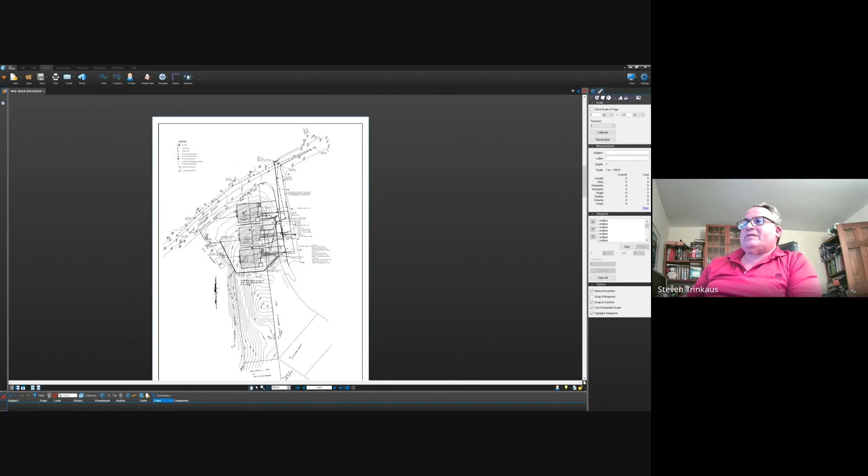We had many different layouts that utilized the entire site, with a building down on the bottom, basically parallel to Reservoir Street, and then another building up on top of the hill, where you've got a ridge top along the back of the lots from Knollwood. This is all rock up on top of the hill, but we had layouts that were up to 12 units in total.

What the applicant basically discussed with your former planner was, as of right, there were 2 lots here, we could have done a duplex on each. They're just asking for 2 additional units, for a total of 6. One would be 60% affordable, one would be 80%, and you'd have 4 market rate units. That's the proposal.

I'm sorry, there's going to be one at 80% and one at 60%? Yes, correct, Kitty. Out of 6, 2 of them have to be affordable, so yeah, one's at 60, one's at 80. Can you show us which is which? That hasn't been determined, I don't know which ones it would be. The units are all identical in this case, square footage is identical, which meets the comparable requirement under 8-30g that the unit sizes be comparable. So you couldn't have, for example, a market rate at 1,000 square feet and an affordable at 800.

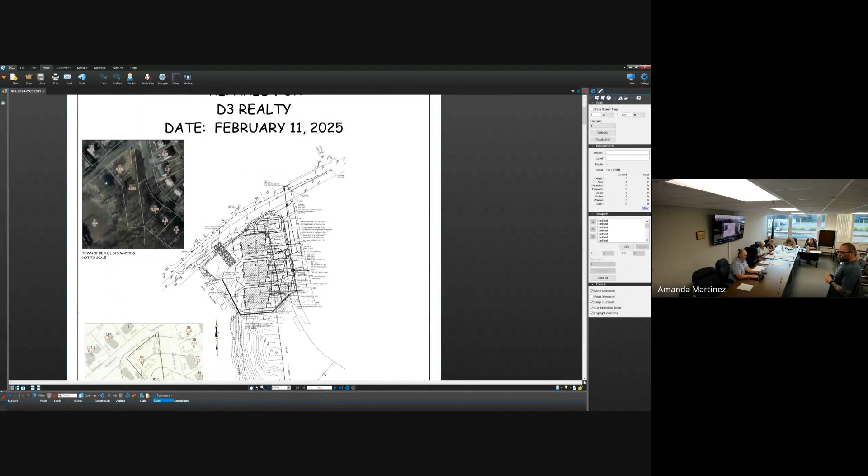There was one just built, 68 and 66, on the opposite side where there was a curtain drain put in. The people building it tied in the curtain drain to the storm drain, which goes into my backyard to the creek. That increased flooding at my house. Now anytime it rains, I get flooding in my backyard.

Not to mention the $20,000 worth of stuff I've already lost in the 5 years, plus what I had to invest trying to help the flooding issue. Nothing's been done to curtail the flooding, but we keep building in this area where there's flooding. I forget who, maybe the planning and zoning guy who's not here anymore, told me you shouldn't be allowed to build in this area because it's a flood zone. If he had his druthers, he would have bought all the units back and used that as a flood zone area, not put any houses there.

Who told you this? I told you about this when we first talked. The guy, was it Palmer before? How long ago, 2 years ago? It's Steve, I think. So he's telling me you shouldn't be building over there yet. I think it's Steve.

Hi Janine, that's my neighbor. Her house gets flooded quite often. She used to have this beautiful backyard. She's lost like 40% of it. Everything that went all the way back is now all the way here.

Now we could sit there and say it's because of weather increments, whatnot, but we're adding stuff in that area that's adding to the flooding. The Toll Brothers project over there was supposed to put good drainage in the ground, but it was done improperly from what I was told, and we still have more flooding. I don't know right now that we should be allowing anybody to build until we take care of this flooding issue.

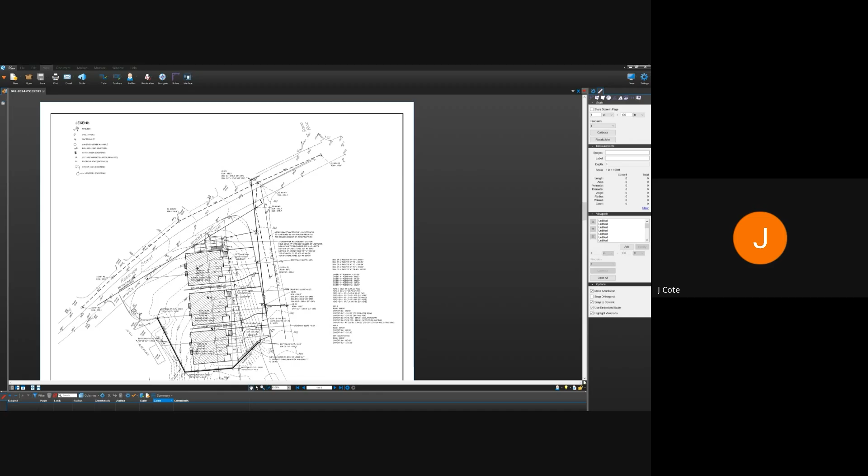But the last storm we had, the town was down here. I showed the town pictures myself of the curtain drain, of what the builder built, which to my understanding is the same builder that is going to be building Reservoir, correct? Or is this the one that just built 66 and 68? Is that not the same builder that's going to be building on Knollwood?

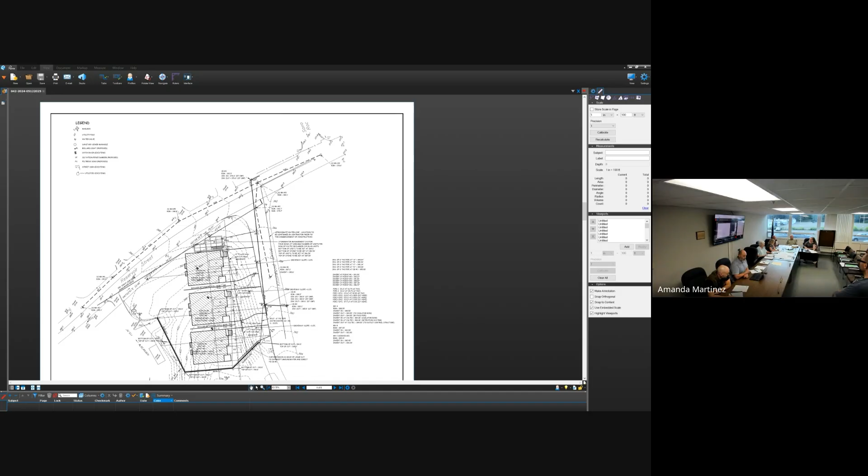Are you guys on Facebook at all? I'm sorry, go ahead. Are you guys on Facebook at all? Wait, no, anybody here on the town Facebook page? No? Okay.

So did you see the guy in the kayak with the beard kayaking down the street when we had the last storm? That was me. I kayaked from the backyard around the side of my house down my street to get my neighbor's stuff and bring it back to them. That's how bad it is.

And we're not addressing it. We're not doing anything for these people who pay taxes. One of them who goes under is Ed Keough, which some of you might know. He does a lot of work around the town.

A lot of his people. What's his name? Ed. I always screw up his last name. He's my neighbor. Steve DeShell lives on the street too, doesn't he? Yes, he does. Thank you.

So it's not like these aren't people who give back to the community. It's not a minor problem. Again, this is a major problem, and it needs to be addressed before building something else. Thank you very much. We'll have to do something about that.

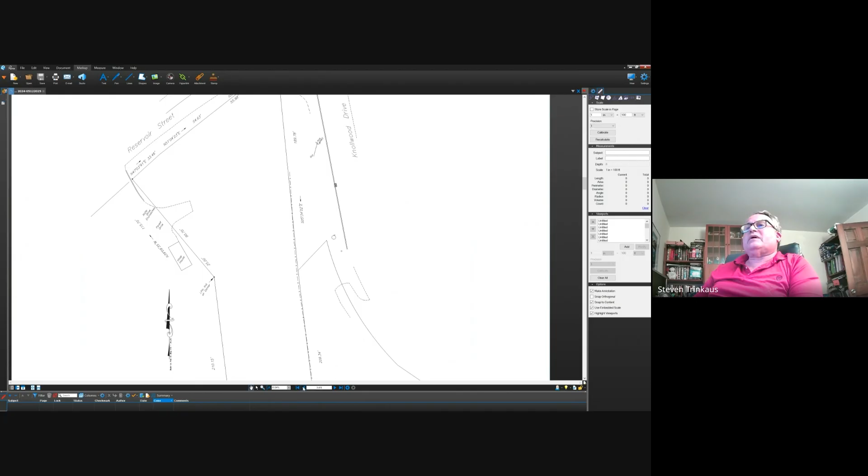Let me just go back to that sheet. Hopefully it'll show up quicker. I guess it goes the other way. Excuse me one second. Computer is being perhaps a little slower than I'd like for some reason tonight.

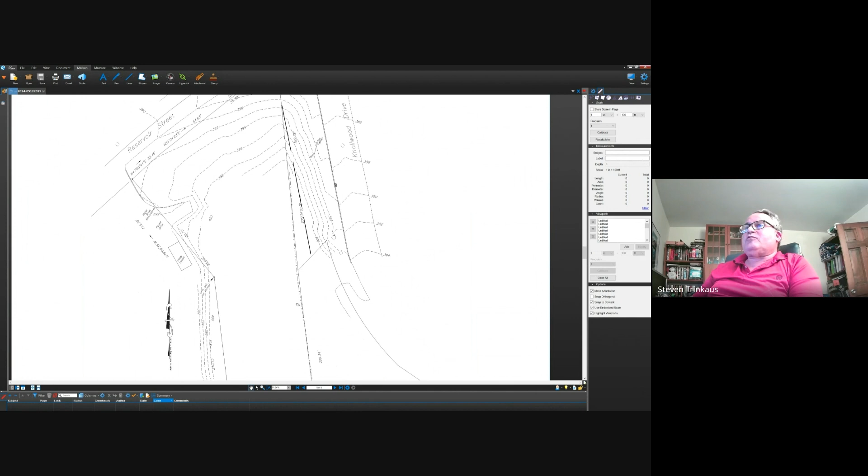But we will have detention, which virtually none of the other properties along Knollwood provide. The right-of-way line on the west side of Knollwood is set very far back. I have no idea why it was set that far back. Most of the time on a subdivision road, the right-of-way is 50-foot wide with the road centered on it. Why it was so offset to this side, I don't have an answer for it. It's just there. The driveways will come from the west side of Knollwood up to each structure.

There were concerns by Eric Swenson from your DPW department about the town potentially being asked to maintain the trench drain along the driveway. In response to an email from Jeremy, your planner, I said my client would be happy to sign a hold harmless agreement that all the work within the right of way serving each of these duplexes will be maintained by the owner or the homeowners, with no obligation of the town to maintain any items within the right of way that we need to simply get to our house.

Let's see. I'd like to actually change what I'm sharing here. So I'm going to get rid of my plan for a second and pull up something else.

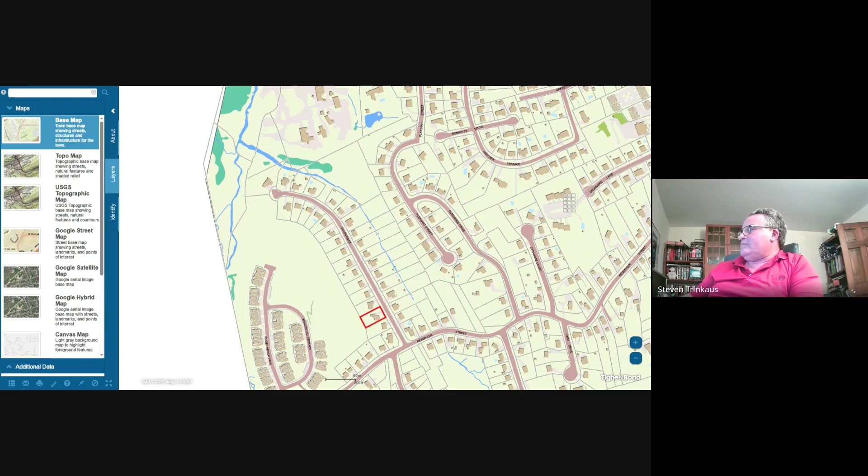Two additional units on Knollwood over what we could do as of right is not a traffic impact. In Mr. Murphy's case, regarding the proximity of the unit to the edge of the road, yes, it's a hair over 13 feet from the edge of the pavement. But let me stop sharing this and go back to my plan for a second.

It's important that when Mr. Murphy is exiting his driveway, his sight line, when he's looking to the east, back towards town from his driveway, he is looking in the westbound travel lane, which is the one farther from our site. So it is not crossing, it stays within the right of way and would not be impacted by that house, because the westbound traffic is what's coming up over the hill towards him.

He's not looking at the eastbound lane because that's the lane he's turning into to head back to town. If he's making that right-hand turn, he's going to be looking left to the west on Reservoir Street for a car coming that direction, so it's safe to pull out. If he makes a left, again he's looking on Reservoir Street, but at the westbound travel lane, which is the north side of the road, not the south side. So the proposed unit does not interfere with the sight distance in any shape or form exiting his driveway.

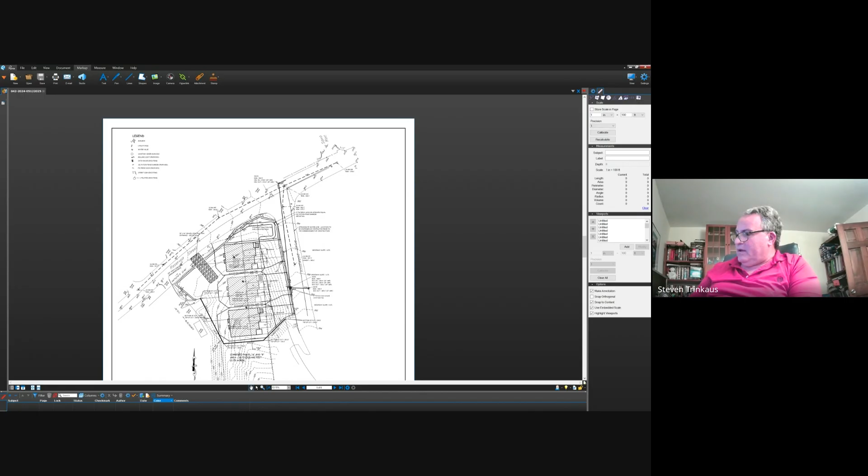I think that addresses the comments, and I'm happy to allow the continuation of the hearing. I can take a look at it, and your consultants, whoever you retain, can also take a look at the issue on Saxon Woods.

I think that road, based on what I can see on the town GIS, they probably shouldn't have put the homes on the right-hand side of the road. It's a very flat area with the brook in the back. I think that's probably where the water historically went before the road was built. Again, that's just based on 40 years of doing land development work. And it's unclear if maybe some of those homes on the east side of Saxon, some of that may have been wetlands. It's anybody's guess.

But the wetlands regulations did not come in until about the mid-70s, so development that occurred before that, builders could have done anything, including filling in hundreds of acres of wetlands. Our site is not wetlands, it's not near wetlands, we're really high and dry. But based on my experience, that kind of appears what may have been done on Saxon.

But we're here today, so the thing is, what can be done to address the issues from the neighbors, which are very legitimate. Our project is not going to adversely affect them, but it's all existing runoff that we need to see if something can be done. Thank you, I really appreciate it. So you could get back.

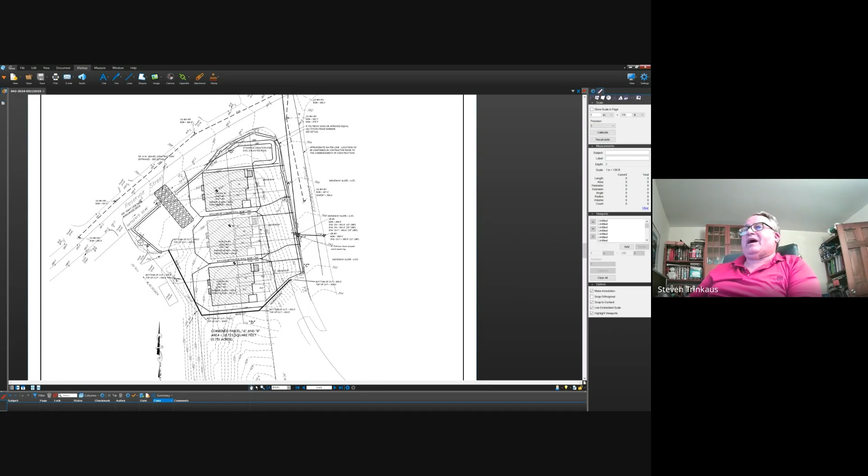So we're not going to impact those utility lines. We're going to bring our utilities off the existing transformer up to each of the homes, so the existing power lines will be maintained underground. It's kind of unusual why they didn't run the power lines underground from Reservoir Street, but they evidently just put one pole in and then went underground when Knollwood was built. It doesn't really make sense. Generally, Eversource, when there's a new subdivision, sets the entire new utility underground, but they put a pole roughly 100 to 150 feet back from Reservoir Street and then went underground.

Anybody else have any questions? I have one, actually. Mr. Trinkaus, have you done a title search yet on that property between the road and your property line? I believe, well, it's town owned. It's not—we don't own it, I can tell you that much. There's a fence here you can see, and the property line is right there. That's all we own to.

So the area between that fence and the physical edge of pavement on Knollwood is part of the town right of way. It's owned by the town of Bethel, I believe. Jeremy talked to, or had, the town attorney look into it. Maybe he should weigh in on it. Thank you, Madam Chair.

The town attorney did send a letter to the board. Did you get the commission? Yes. It was around the second, that the town does believe that the applicant needs to do a title search on that property, because at that time when the roads were handed over, we're not sure what was and wasn't. And it's really on the applicant to determine whether that's right of way or town property, not the town.

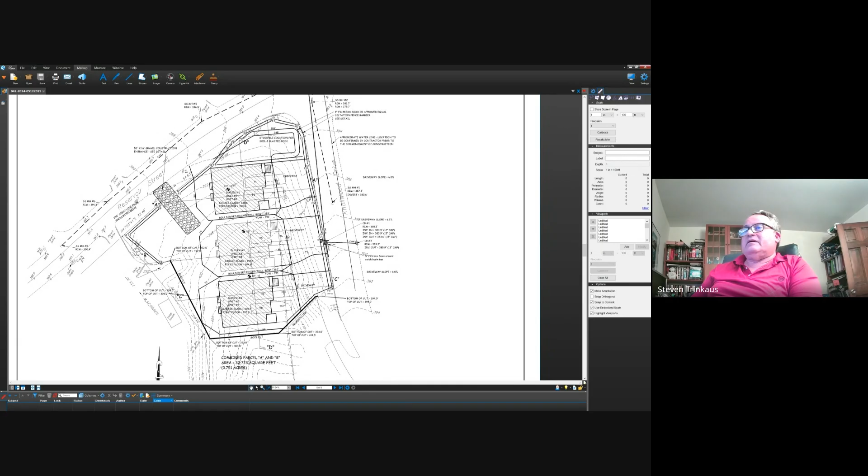So that... well, I mean, title search, I'm sorry, that's the recommendation of the town attorney. Right. Well, you know, again, I did a lot of land surveying in the late 70s and most of the 80s. You know, if we were searching this property, we'd find our site, we'd find a boundary of a fence line. Then the area between that fence line and the road is the road right of way.

And I know the town attorney had an opinion that she wasn't sure the town owned it, and I spoke with Jeremy about it. Basically, the town has issued building permits up and down Knollwood since it was put in, so you have to have frontage on a town road. So how it, quote unquote, did not get officially adopted is an open question, but clearly the town maintains it.

So my perspective from development is the town owns it. I can check with our counsel, but the surveyor—actually I'll check with the surveyors doing the land surveying—because in doing their survey they would have done a deed search, which is a title search, for this. But our deeds definitely do not go beyond the fence line.

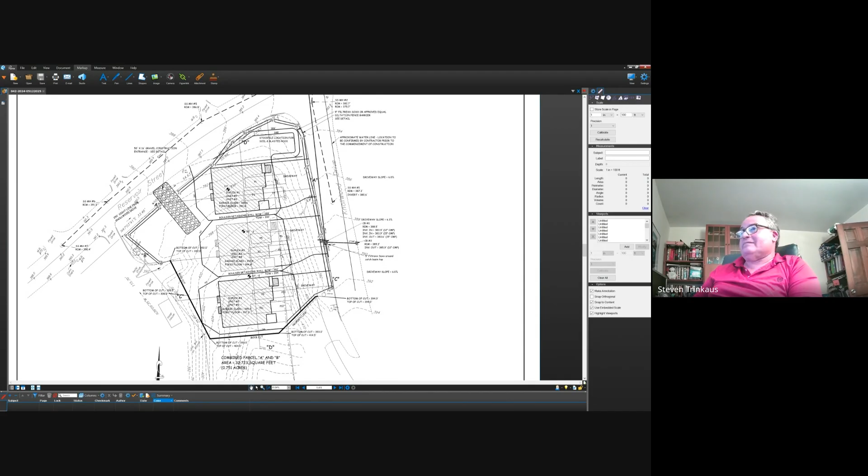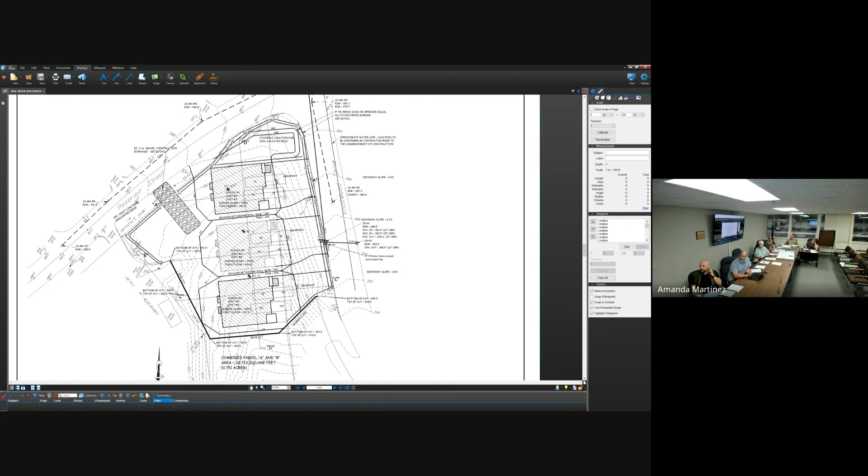So the confusion, Madam Chairman, is that at some point they changed the rules on how we accept roads in the town, and the roads were actually deeded over. There's some confusion on this old property. It clearly was on the map that it was reserved for the road, this piece, but we don't know when the road was given, if it was actually the road or if it included that. So the town's position, or the attorney's position, is that we're not sure, but we can't have somebody build on something that we're not sure about. It's on the applicant to do a title search.

And by the way, it's important to know that the applicant actually came to the town informally asking if we would sell that property to them. So there's knowledge there that it could or could not be the town's, in their opinion, but we don't have a deed showing it is. So it's really going to be on the applicant to show that before anything is done. We have to know that. That's what the town says. I just want to make sure you understood that, because on the town side we've been concerned, and I just wanted to throw that out for you guys to look into.

Thank you very much. Steve Trinkaus, for the record. I said I will talk to the surveyors, but if our deeds go to the fence line, that's all I own.

And the area between that fence line and the edge of Knollwood would be town of Bethel. We're happy to look into it, but that's what the deeds would show. If they go to the fence line here, that's the limit of our title. The rest of it, being adjacent to the road, it would be assumed the town owned it. There's no other private owner showing in this area, but we'll look into it.

I believe it is town land, and like any other lot in the town of Bethel, all driveways cross the right of way that the town owns to get to a single family house or any development, because the limit of the right of way is generally 12 feet, give or take, from the edge of the pavement back. This is really unusual.

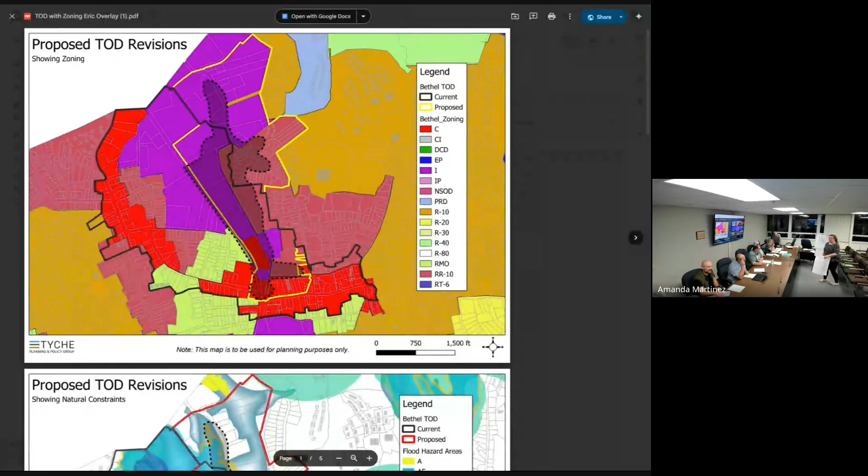A few months ago we had asked staff to draw a map to adjust the size of the TOD. That's the original one. Do they have that? Yeah, these are the ones I printed, apparently weren't big enough, so I'll just leave these here for you guys.

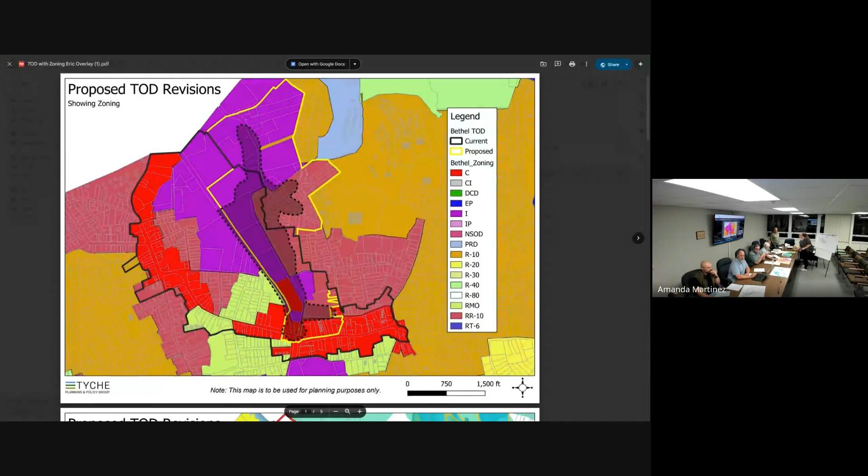Okay, are you seeing the TOD maps on your screen there? Yeah, I'm just gonna make it bigger. This one up over here. Okay, oh, colors.

Mr. Chair, if you're ready, I can give you a brief overview of the maps we've put together. You have the floor, Jeremy. Okay, thank you, sir. I've got 4 maps that I'm going to throw your way over the next couple of minutes, and I'll give a brief overview of each. So what you're looking at now, I should give a brief background.

When Tyche was brought on board to fill in after Beth's retirement, we were asked to put this on the front burner. I know it had been discussed for quite a while, a year or so. I spoke with the chairman about this, and I spoke with your first selectman about this as well. I was made aware of a presentation that Eric Swenson had given back in, I think, March.

He proposed a rough boundary line of an area to the west of the existing train tracks, because the platform is on the eastern side. So what you're looking at here is the thick black line, with your zoning map underneath it. The thick black line is the existing extent of the TOD.

I've been made aware that a couple of properties were added to it in this, I'll say, southeast corner over the last couple of years, but I think the map itself has not been updated, so I apologize—I just became aware of that. But the thick black line is generally the existing TOD.

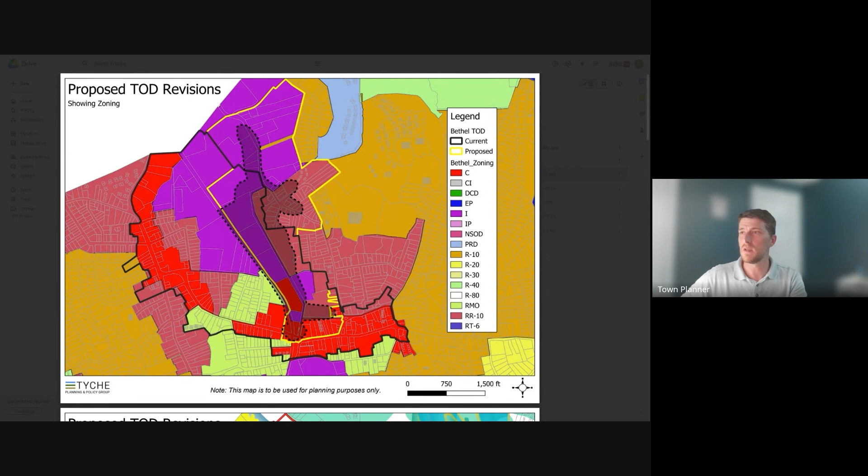You'll notice that in this yellow area, this portion in the northeast corner is much larger, simply because those are larger lots. Just following his dashed line, we grabbed all the lots that are within it, and that's what you end up with. So this is a first attempt at what that boundary could look like based on Eric's initial map from March, with the existing zoning underneath it.

The second map is essentially the same thing, but with some of the natural resources, because I think it's important to be aware of the constraints that are out there. The various shades of blue and yellow are flood zones—the X, which is the 500-year flood, is in yellow; the teal color is the 100-year flood zone; and the darker blue is a floodway, which follows that river.

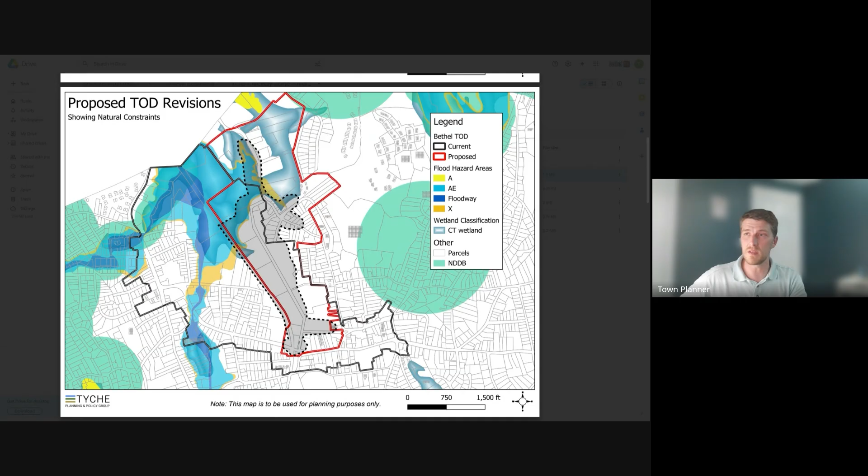This teal with a gradient is wetland soils. You'll see that a fair amount of your existing TOD, especially up in this northwest corner and the northern end in general, is fairly constrained. There are existing buildings up there. There are ways to deal with this, but it's just good to be aware of.

The next two maps are ones that Eric put together within the last couple of weeks, just before we were going to meet on this two weeks ago, showing a revised potential TOD based on his experience and some of those natural constraints, and conversations he's had with others. This neighborhood over here was initially in his outline.

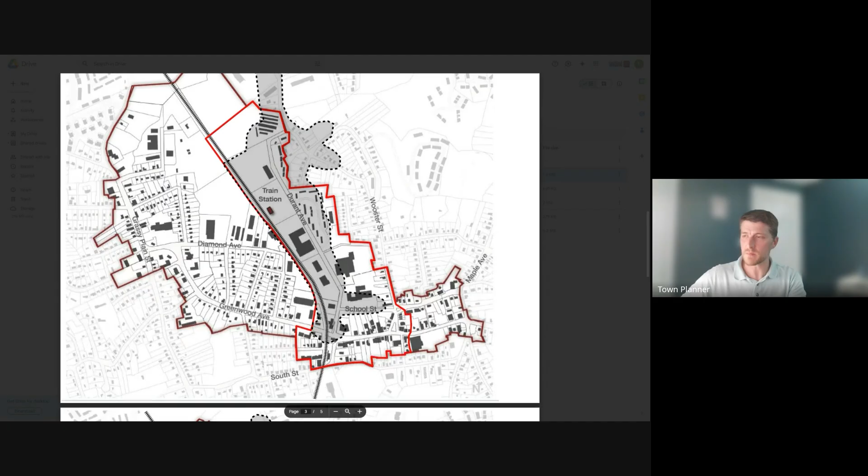He's taken that out. He's thinking it might make sense to expand the TOD a little bit along Greenwood Avenue and out toward P.T. Barnum Square, encompassing the town hall site and some other locations along the south end of Greenwood Avenue. So that's one configuration thrown out there.

Then finally there's another map where he threw in some dashed lines for you all to think about in terms of additional expansions and areas you may want to consider keeping in the existing TOD because of walkability, existing development patterns, the bus line that runs through, and other factors. I wanted to show these briefly, and then show you one other map that I think is relevant.

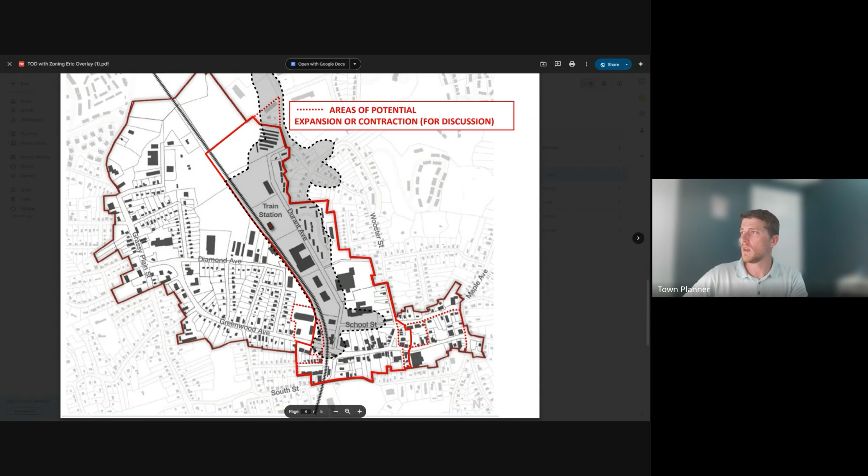I need to figure out how to switch here. Where's my PDF? It's not that—bear with me, I apologize.

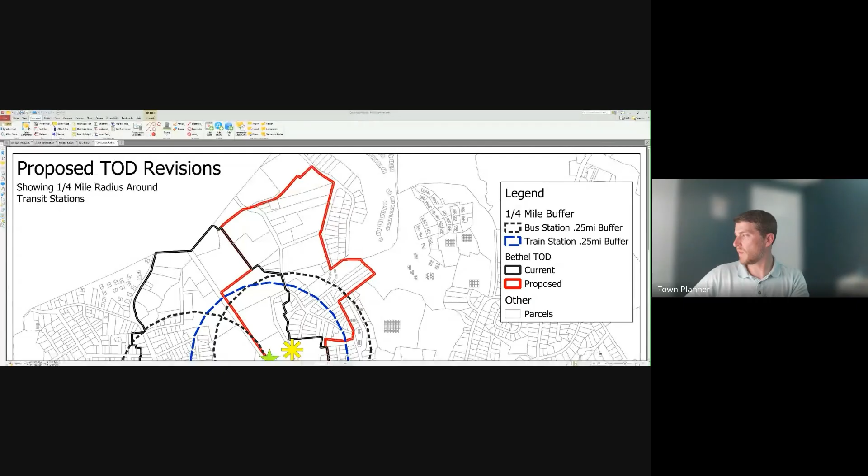There we go. All right, are you seeing another map on your screen there? You should be. Oh, no, sorry.

So this is just another map that I put together, again, showing the existing TOD boundary in thick black. This is just a parcel map, the original proposed TOD that I had put together a while back, with your existing train station marked by the green star, and then these yellow stars are your existing fixed bus route stops. I think it's important to consider those. They are not train stations, they are bus stops, fixed route stops.

The reason I put that together relates to recent legislation, House Bill 5002, that's now been given public act number 2549. There's a lot in there about priority discretionary funding for existing TODs, and I think it's worth you all knowing about that. That legislation is somewhat up in the air over the last couple of days. It looks like the governor is asking for changes, maybe he'll veto it, we're not really sure where it's going. If you'd asked me a week ago, I think me, my colleagues, and the rest of our field were pretty sure that legislation was going to go through. Now we're a little more on the fence.

But I figured it was worth noting where those stations are, so I'm showing a quarter mile radius around each one. The blue is a quarter mile radius around the train station, and those black dashed lines are a quarter mile around each of the bus stops. Those are what we put together for maps. I'm looking forward to a conversation with you, and we want to get your feedback, of course.

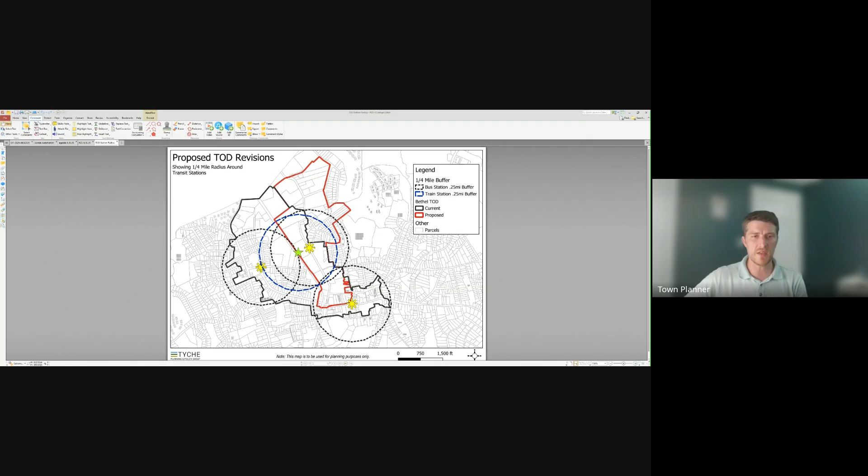One other thing I want to mention is that Eric had, I'm going to stop sharing this for the moment, we'll come back to those. Eric could not be here tonight, but he did ask me to pass a note off to you. He asked that I reread a paragraph from the original master plan to the commission as a reminder of his initial concerns and considerations regarding transit-oriented development west of the tracks. Let me get to that paragraph. He wanted me to point out to you on page 16 of A Plan for Bethel, which was the downtown master plan.

There's a note toward the bottom of that page. It says connecting both sides of the railroad tracks is critical. Note, this is a key consideration made numerous times and in a variety of ways across all stakeholder groups. The three bullet points are: must create gated pedestrian connections across train tracks; unless pedestrian connections are established, development west of the tracks will not be transit oriented; and the town should push for establishing pedestrian crossings in the most cost effective and cost efficient way. That's the comment Eric had wanted to make if he had been present tonight.

So I will give it back to you, Mr. Chair, and see where we go. All right, so what do you got? I usually start on this. Thoughts, concerns?

I've seen these for the first time. They've been on the Google Drive. Yeah, I'm sorry, like I said, I've been out. So I don't feel comfortable giving a comment because it would be not even partially baked. No, that's fine.

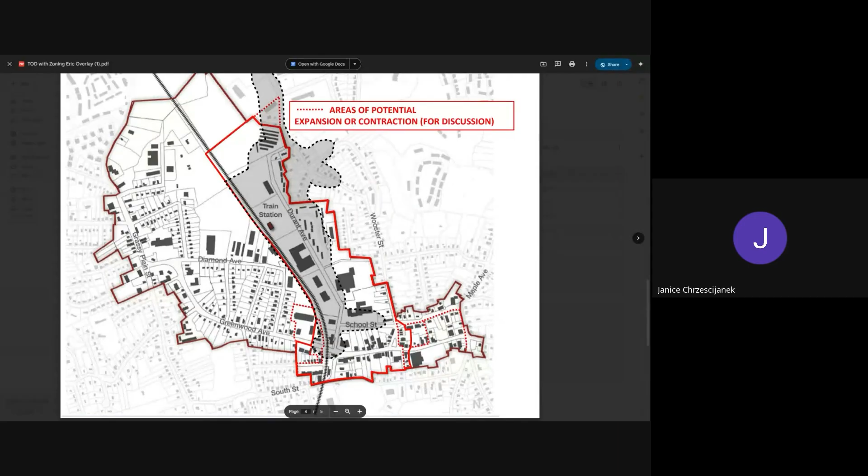You're the oracle on this one, what was it? I'm hearing it's close to 20. We're not, we're talking about when it first started. Yeah, it's substantial, I keep begging for it. Does it get inflated? That's incredibly inflated, since that was based on a conceptual plan, and there are other options that would be a much lesser cost. That price has gone up multiple times. But when Eric gave the presentation, he showed what the other ones cost in other towns, and that's what we were estimating when we started. I know, but we're talking about now.

Well, our goal tonight is to accept or modify or come to a consensus on where we want to draw the red line on the map.

What map do we want to move forward with to start the public hearing? Okay, so our goal tonight is to come to a consensus.

I think the consensus of this board was to shrink it. We had a motion last time, but we rescinded it, I guess, following Eric's walkability map here. So everything is mostly on the east side.

I personally didn't realize the wetlands went that far. I feel that I want to throw the train crossing off the table, because this isn't just about getting to the train station.

There's businesses on the west side of town that are looking for people to be able to walk to them. Not everybody focuses on Greenwood Ave and the restaurants and grocery stores, or Main Street. But there are businesses on the other side that need those walkability people over there.

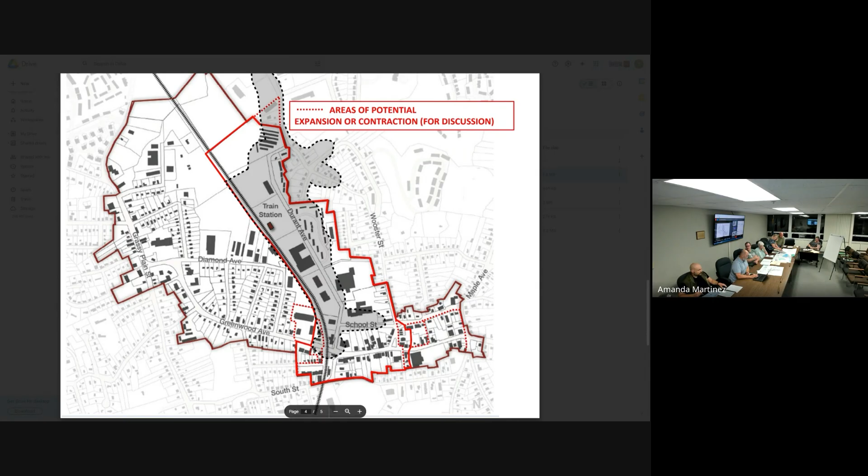So whatever we decide tonight is not set in stone. If we decide this is the map we want to start with, we're gonna set a public hearing to present this to the town. The town public will have their time to give us their opinion, whoever wants to come and give us their opinion, all of us can give our opinions. If we want to pull out the Sharpie at that point and make some adjustments, we can.

And then we'll vote on it. And if it passes, it passes. If it doesn't, if you want to make it bigger, we can always make it bigger. You're bringing up very valid points, but I'm just, right now, I don't think we need to get into that.

We need to just, again, I'd be in favor of this map right here with the exception of this part that goes onto the west side, just in the spirit of the motion that was made. And this could be the starting point. Now, Jeremy, correct me if I'm wrong on anything I've just said.

Yeah, I wouldn't attempt to correct you. I think there was a motion that was made. I think it's not tied to anything specific. There's no application. There was no hearing set.

At this point, what we're trying to do is come to a consensus on what it is, what the line needs to look like, so that we can go ahead and file that application, accept it, and then schedule a hearing like we would with any other application. So I think I understand what the motion was that was made a while back, which was to keep it to the east side.

But I think if sitting at the table, the 6 or 7 of you that are there say, well, it's east side, but we also think these parcels on the west side make sense, you're not beholden to that motion at this point. We're not at that point where you're beholden to anything.

I think once you come up with a consensus of what we want that red line to look like, then we'll go back and make that change, and then we'll file the application with that map. And then at that point, then you're stuck with that map until we get to the public hearing piece of it.

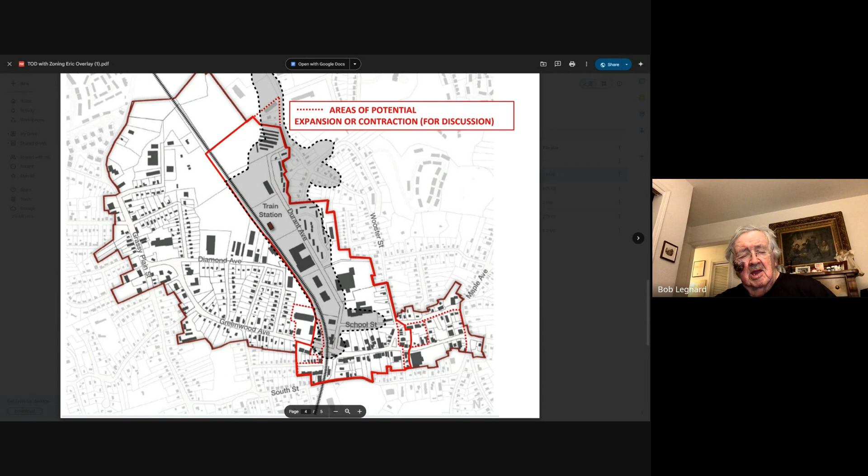You can reduce it, but you can't expand it. Because once it's there, someone could say the notice said it was going to be this area, and if you expand it, they'd say, oh, I would have shown up if I'd known you were going to expand it. But you can reduce it on the theory that you had notice it would encompass this, and reducing it is lesser, but you can't make it larger than what is in the original notice.

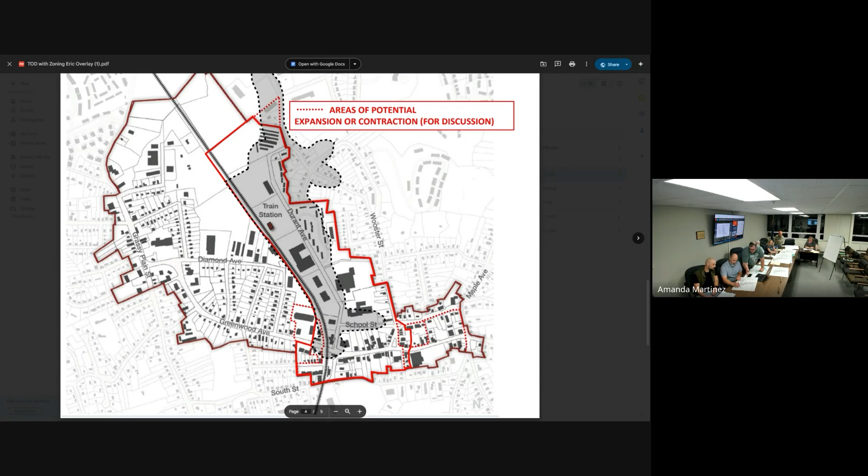So if I want to pass this down to everybody, just keep in mind this is not set in stone, I'm just trying to find a starting point. That's all we need, just a starting point to work from. We'll add this in, and if we get into the public hearing and decide this isn't what we wanted, not in the spirit of what we were thinking, we can always remove it, but like Chuck said, we cannot add it.

I did that one as well, and I circled this. You've got Diamond in there too? Yeah, it's up for discussion. And what I would say is that if you get into the public hearing and find there are areas we didn't include in the filed map, we pull the application, redraw the map, and do another public hearing. So you've got that option if needed.

Okay, perfect, thank you. So all the thick lines and the little blue line here, adding this little piece up here, this is the Diamond Avenue portion that we discussed a long time ago. And then these are like the Dolan Plaza, and this is the car lot. So again, we're just trying to get it to the starting point.

Good start, isn't this a lot of wetlands right here? Yes, it is, so wetlands right here. Floodway versus flood zone and wetlands are two different things. So wetlands are this shade, it's hard with a lot of colors on here. Wetlands, well, that's what that is up there.

Again, we can get into the specifics when it comes to public hearing time, I'm just asking you guys. It's a jumping off point, a jumping point, exactly, that's exactly what it is, a point to start.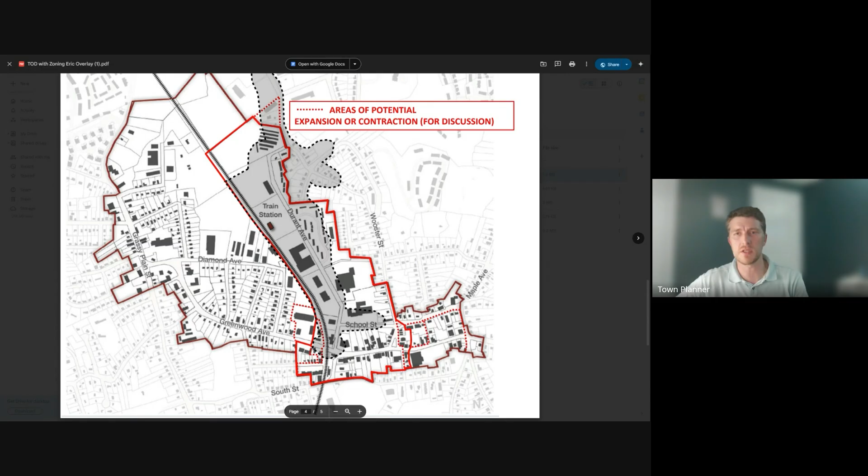Yeah, and I'm sure Jeremy, you could do that. Yeah, I can make a simple map. I just wanted you to be aware of some of the constraints that were out there. But yes, the map that gets presented to the public will be essentially a parcel map with 2 lines on it, the existing and proposed.

The circle map that we had, what was that showing? Some bus stops and the train station. Was it showing how much people have to walk, like a quarter mile? It was showing quarter mile radiuses.

Yeah, it's on this. It's on the Google Drive.

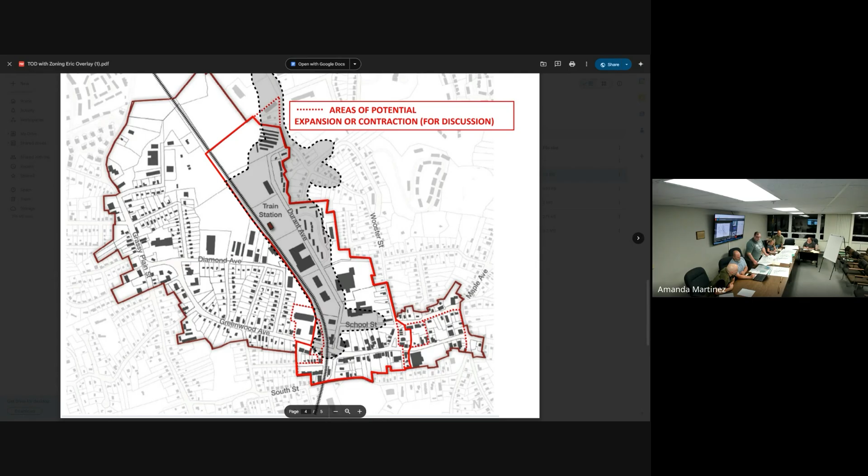Okay, do we have to show him the map line? Yeah, Bob, how do we show you this? You want me to hold it up? Yeah, try to hold it up to him. Steve, make sure he's okay with it. Here, do you want me to do it? Okay, he's okay? He's okay. Are you okay? I'll hold it up to you.

Okay, all right, so we'll drop off the paper copy. We're gonna put my signature on this one. All right, Jeremy, we'll make sure you get a copy of this and we'll move forward with it.

Do we need a motion? We don't need a motion at this time. What we'll do is I'll take that map, we will file an application based on that map, and we'll get that in for the next meeting so that you can accept the application. And then after that we can set the hearing date. Make it a work in progress.

Excellent, perfect, thank you. Now what do we have to do? We're gonna move on to public input. Does anyone here have anything?

Yes, just very quickly, come on up. Nancy Sudik. I just want to reiterate what I said before, and I won't belabor it this time. It's just when you have developers and their representatives who are paid to take your questions and answer them, and they stonewall you, even if they couch it in nice terms, like 'oh, I forgot to answer that' or 'yes, I'll get that to you next week'—yes, I'll get that to you next week, oh yes, I'll get that to you next week—that cannot be acceptable. I don't understand how this commission can accept that.